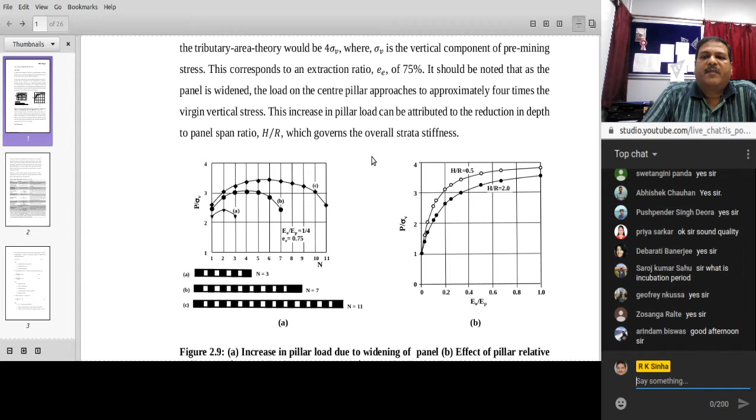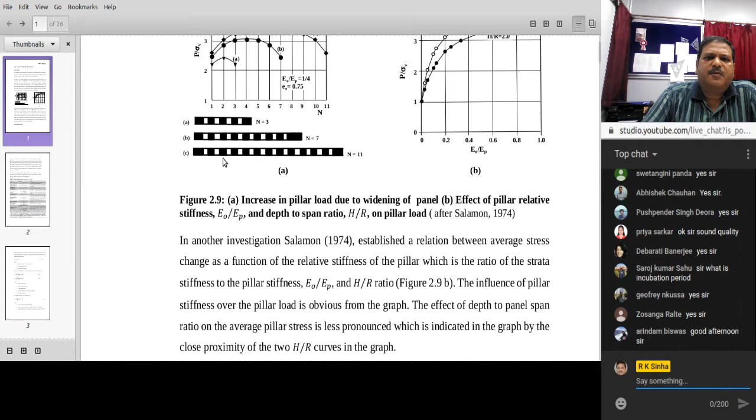So the integrity of the pillar is dependent upon how much load is coming on the pillar and also how much strength the pillar has. That we will discuss in just a few minutes. So these are the write-ups of those two graphs which I have already explained.

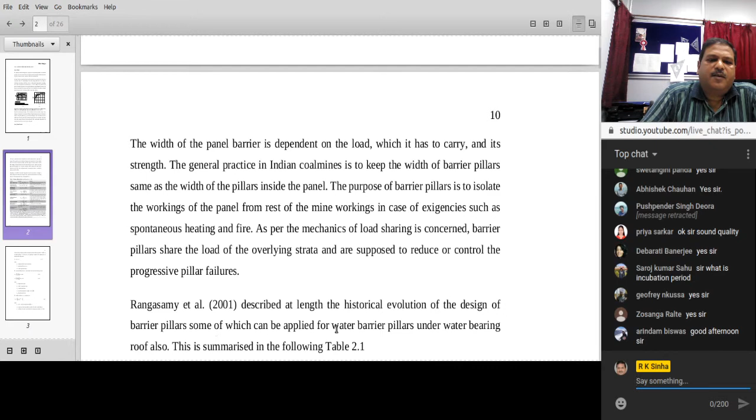Then one very good research was done in South Africa regarding the size of the barrier pillar, by Rangasamy and others in 2001, where they described the historical evolution of the design of barrier pillars, which can even be applied for barrier pillars under a water bearing roof. A summary of that is given here. You need not memorize this; these are empirical relations used long back in the mining industry, but they have slowly lost relevance. Rather, the formula given by Wilson is used frequently.

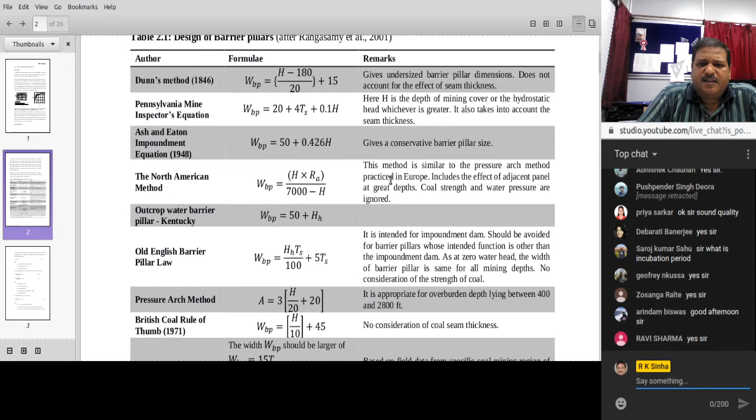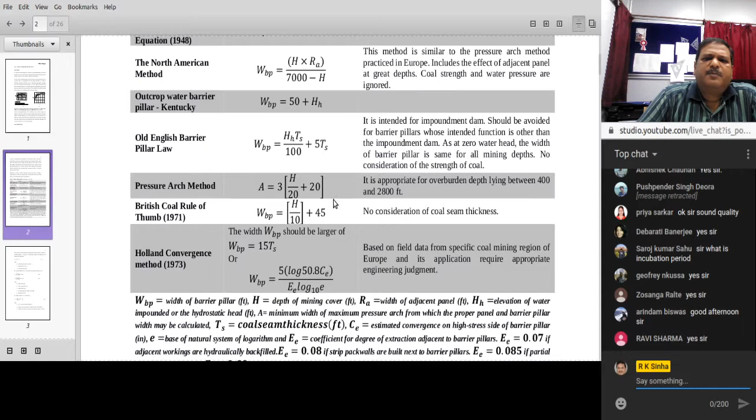So these are just for the historical or chronological development of barrier pillars. In the remarks column it is given which factor is considered and which is not, but while these were in use, accidents were still taking place in the mines. From 1846 to 1973, these formulae were quite popular. This is just for your knowledge and reference, not of much relevance as of date.

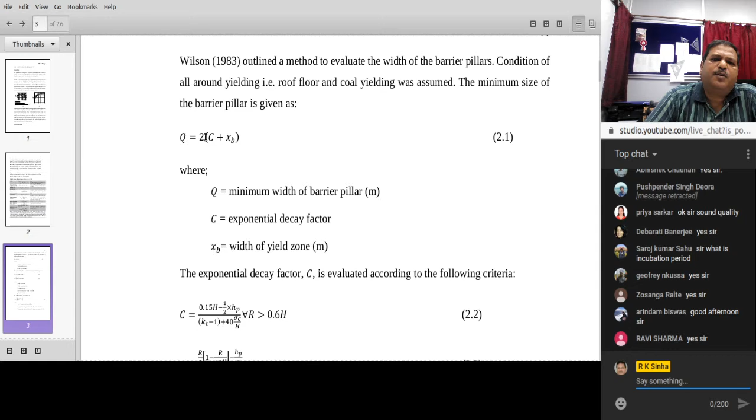Then in 1983, Wilson gave a formula to evaluate the width of barrier pillars. This is the formula used to estimate the width of the barrier pillar. It is given by the sum of two terms times 2, where q is the width of the barrier pillar, c is an exponential decay factor, which I will show you how to calculate, and xb is the width of the yield zone. When these two are added and multiplied by 2, you get the width of the barrier pillar.

Okay, the exponential decay factor c is calculated using this formula when R is more than 0.6 times H. R is the span or the width of the panel. If the width of the panel is more than 0.6 times the depth of the working, then you have to use this formula to calculate the value of c. And in case the span of the panel is less than 0.6 times the depth of the working, then you have to use this formula.

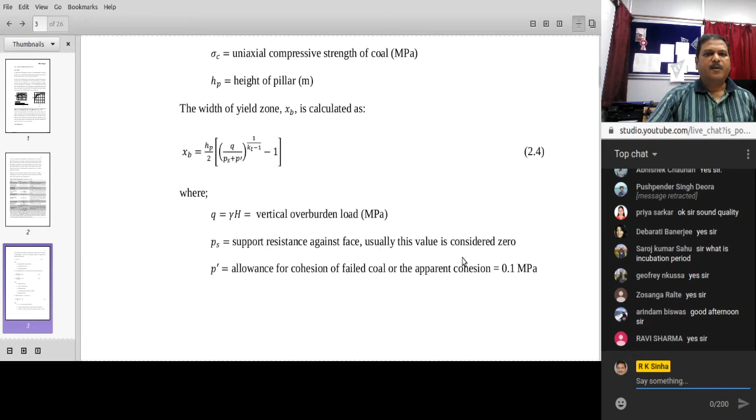And P' is the allowance of cohesion of the failed coal. So what is the C value of the failed coal? That is given as an input, and this is normally taken as 0.1 MPa. Okay, and KT has already been discussed here, triaxial stress factor. Okay, so you can substitute this value XB into formula 2.1, and with this the width of the barrier pillar can be calculated.

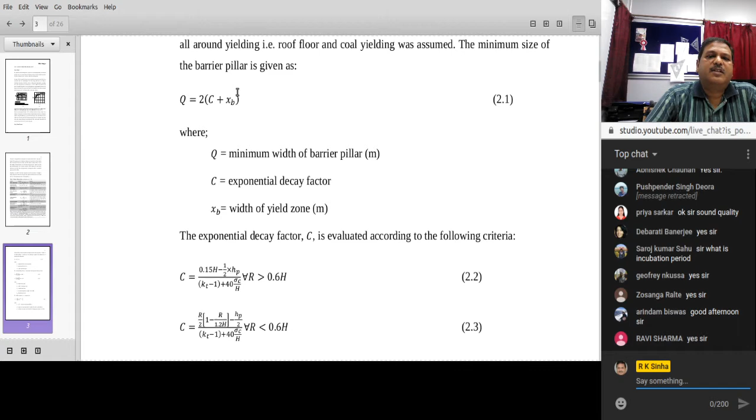So far as this calculation of the width of the barrier pillar is concerned, people have not talked about the factor of safety of these barrier pillars. Rather, they have just tried to estimate the width of the barrier pillar. Okay, now coming to the design of pillars. Like design of any structure, the design of coal pillars in bord and pillar working mines essentially consists in knowing precisely two things: the strength of the coal pillar and the load on the pillar. And when you link these two things, you get a factor of safety.

Now how do we calculate the factor of safety? Say for example, one minute, I will take the pen.

Okay, before we write something, let us consider that this is one sample. Now I am trying to compress it. The load at which it breaks is the strength of the material, and if you give more load it will crush faster, so the factor of safety will be less than 1. Now if I give less load, the sample is taking load but not breaking, so the factor of safety will be higher than 1.

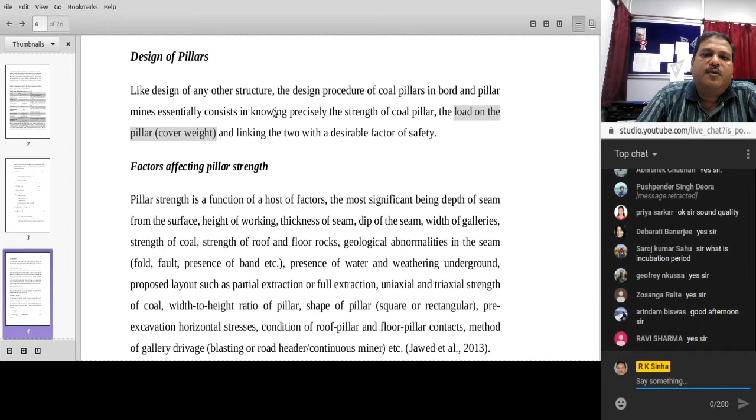So factor of safety will be calculated as FOS is equal to strength by stress. Okay, so this way the factor of safety is calculated. So when you link the strength of the coal pillar with the load that is coming, the load being the stress over the pillar, you get the factor of safety. Now it is not only the material strength.

Okay, are you seeing the PDF?

It is not only the strength of the material; other factors also play a vital role in affecting the strength of a pillar. The most significant one is the depth of the working from the surface, height of the working, thickness of the seam, the dip of the seam, the width of the galleries, strength of the coal, of course, and strength of roof and floor rocks.

Say for example, if the roof rock is very weak and the pillar is strong, the pillar will go on punching into the roof, or if the floor is very weak, the pillar will punch into the floor. So these factors also affect the pillar strength. Presence of water, weathering, partial extraction methods, or the full extraction method of the panel. Okay, all these factors play a role.

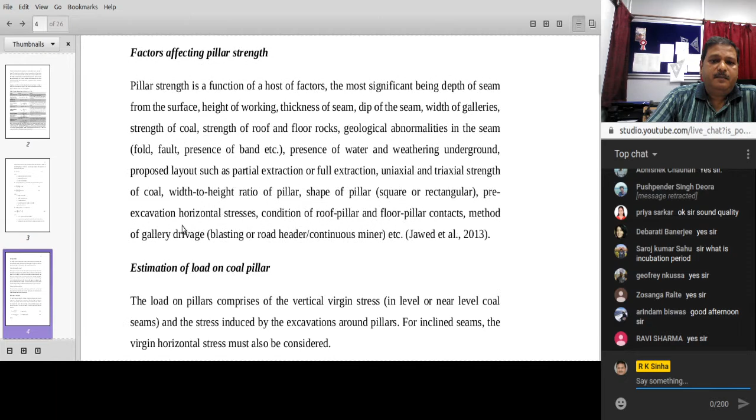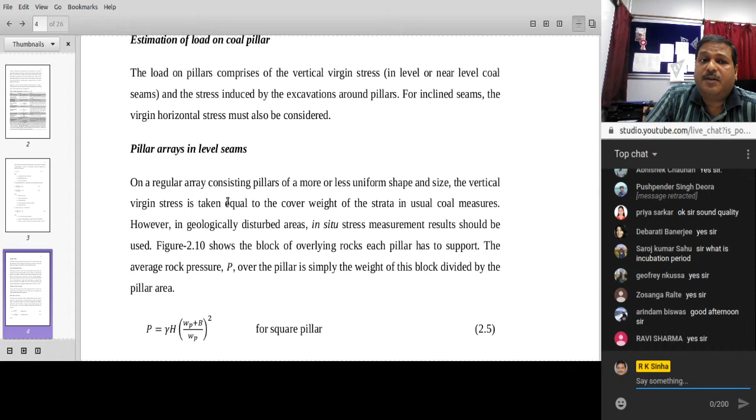So when we talk about the factor of safety of the pillars, the first thing that comes into our mind is how do we estimate how much load is coming onto a pillar. Okay, so this is the formula for calculating the load that is coming on a pillar. It is gamma h or rho gh multiplied by (WP plus B) divided by WP, whole square, where WP is the width of the solid pillar and B is the width of the gallery. This is calculated using the tributary area method.

Okay, I'll just give you a brief of that. Suppose this is my pillar and its width is W, and all around this I have galleries. And the width of the gallery is, say for example, B.

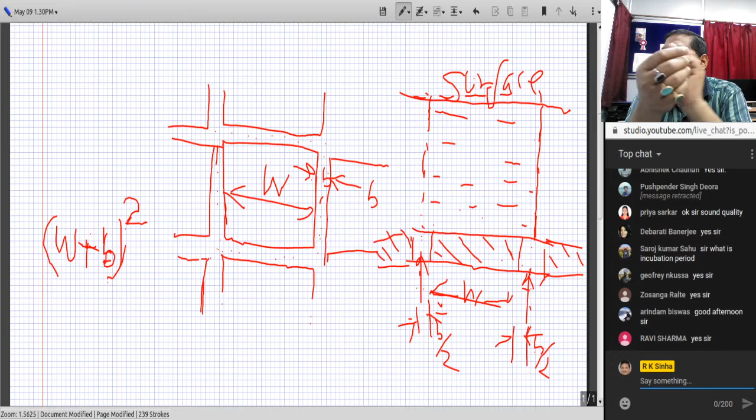And what is the width of this pillar? The width of the pillar is W, and the gallery width here is B by 2, and on this side also it is B by 2. That means the width of the column is W plus B. Since we are considering a square pillar, the total area will be (W plus B) whole square. And gamma into H will be the load acting upon the pillar. So this is stress times area, so it becomes the load acting on the pillar.

Now this total load is shared only by the pillar, and the area of the pillar here will be W square. So this gives me sigma V, or we can say the load acting on the pillar will be this value. So this is how you calculate the load acting on a regular array of pillars.

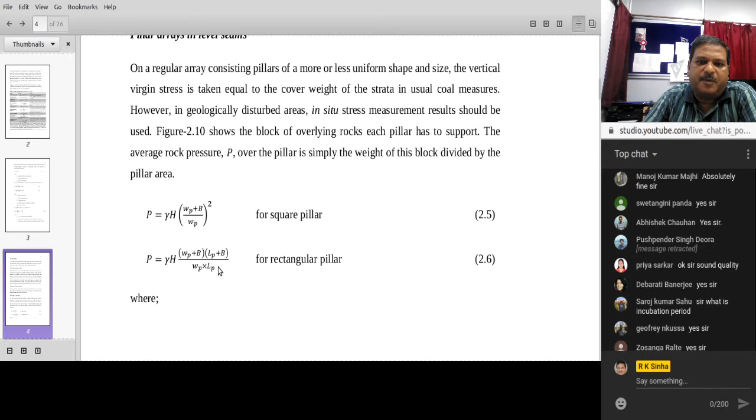Okay, good. So this is how the load acting on a pillar is considered. For rectangular pillars, you can derive it in a similar way. In that case you will have WP and LP. So this is nothing but the area of the complete column that is going to act over the pillar, and WP into LP will be the solid area of the pillar. This is how the load coming on the pillars is calculated.

Now this theory is known as the tributary area theory, TAT in short. And this theory is applicable only for pillars which are in a regular array. That means for development workings, you can very well estimate the load on the pillars using the tributary area method. But the moment...

Okay, Sampada has asked whether the depth of working is measured from the surface to the top of the pillar or to the bottom of the pillar. Good question. In the figure, I will show you.

Here rho GH, this rho GH. Are you able to see the pictures? Okay, let me switch to the scribble.

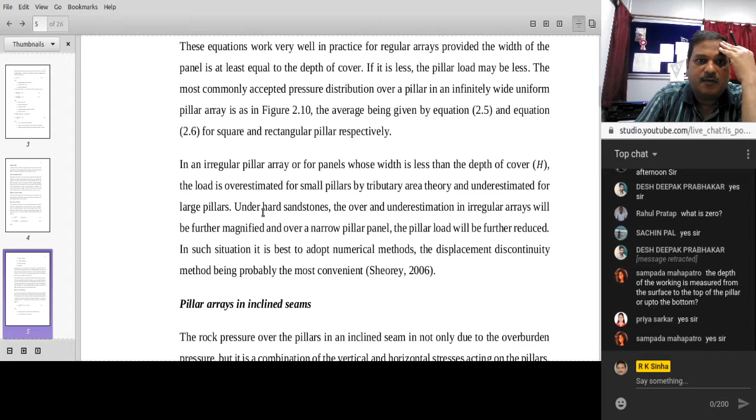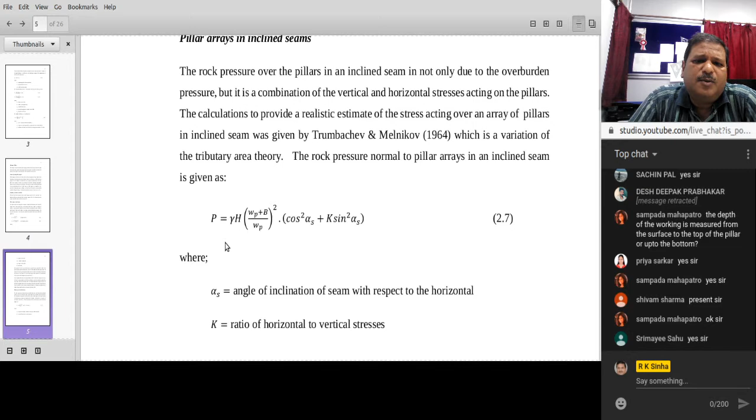Now another problem with this tributary area theory is that here also we are making some sort of approximation, whereas if the rock is elastic, the load on the pillar will not be uniform. It will be higher at the corners and then it goes down, and then again when it reaches towards the other corner it slowly increases and becomes highest. So in fact it will make a shape of an inverted umbrella.

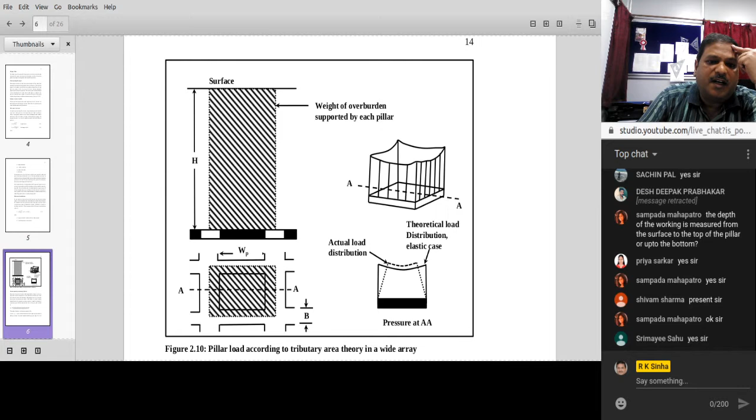Now in case the pillar starts behaving like a non-elastic material, or if there is a consideration of plasticity, then this reduces further as shown in the dotted line. Now some people have tried to use alternate methods different from the tributary area method, and they use numerical modeling.

Roberts in 2002 conducted a numerical analysis by varying the Young's modulus of elasticity, and he said let RL be the ratio of the modeled stress over the pillar and the load calculated over the pillar by the tributary area. He considered the elastic modulus of coal as 4 GPa. So if the value of RL is less than 1, this indicates that the modeled load is always less than the load calculated by the tributary area.

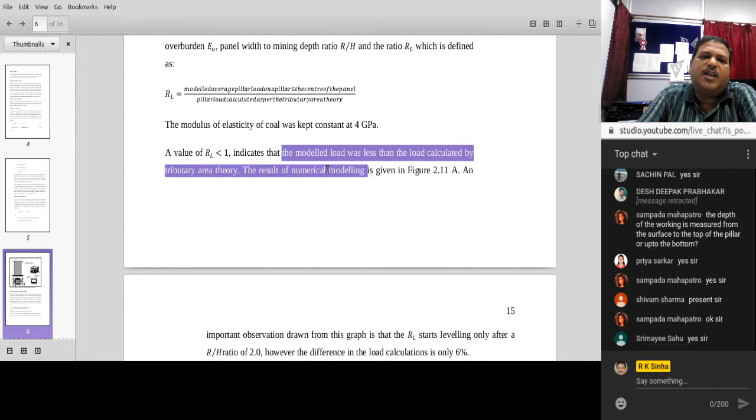RL can also be taken as a percentage deviation from the tributary area load. He plotted RL versus panel width to depth ratio, and he found that this value is less than 1, that is less than 100%. This indicates that the modeled load is always less than the tributary area theory. That means the load coming on the pillar is less than what we calculate using the tributary area theory.

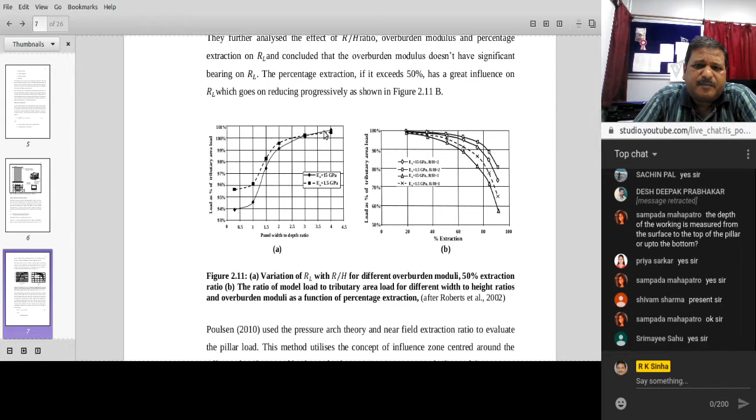But if the width to depth ratio is very less, it goes up to 94%. That means you have an error of only 6%. So the tributary area method of calculating the load on a pillar varies by only 6%. So it can be said that you can safely use this tributary area method for calculation of the pillar load on a conservative side.

Okay, that means the tributary area is giving more load. So at a higher load, the factor of safety reduces. That means you model the pillar as having lesser safety, showing lesser safety, but in actual it will have a higher factor of safety. So this way you are on a conservative side.

Then he carried out some parametric analysis on how the loads, this is again RL value, that is the load of tributary area versus the percentage of extraction. So if the percentage of extraction increases, the modeled load goes down very fast. So here, this left graph is for the regular pillars, but when you start extracting, the tributary area will give you almost up to 40% of error if you have an extraction ratio of 85%.

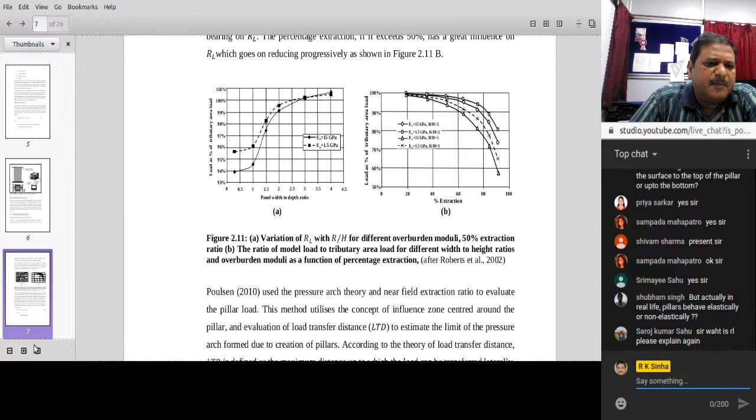Okay, so in the Kirsch solution, what we had studied is that on the sides of the tunnel, the rock element is loaded uniaxially, isn't it? And as you go deeper into the rock, the element in the deeper zone will be loaded triaxially. So obviously when the rock is loaded uniaxially, its strength is less.

So if these are two tunnels driven here, the material in between them is acting as a pillar. So whatever material is near the skin of the pillar, that will act plastically.

Okay, another question: Sir, what is RL? Please explain again. Okay. See, this RL concept is to find alternate methods for estimating the pillar load. One method is the tributary area method. Another method could be numerical modeling to find the load acting on the pillar.

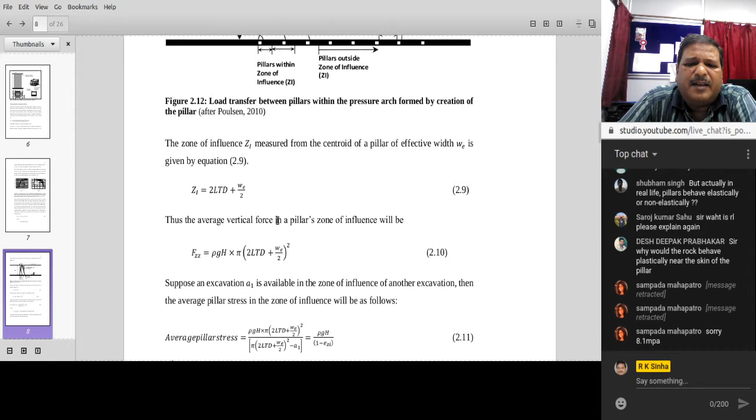Okay, then Poulsen tried to give the load transfer distance formula. That is not much used. In fact, you can just read it for your academic interest. But later at the end he also said that this method must be applied for estimating the overall panel stability rather than designing the pillars. So this LTD method is not used, but mostly people use only two things. One is the tributary area method, and another is the numerical modeling method.

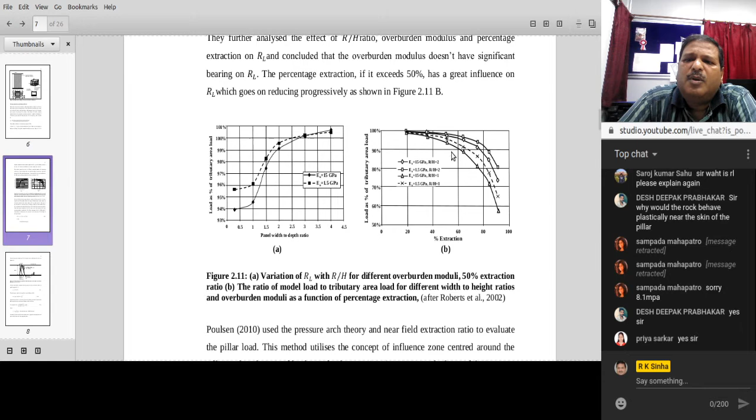And in numerical modeling, these two graphs show that for regular pillars it is only 6% of difference, but in board and pillar workings, when you start extracting the pillars, the array of the pillars is not regular, and once the array is different, the tributary area method can give you error up to 60%. So there you really need to know the load on the pillar using numerical modeling. Okay, so this Poulsen is just for your academic interest.

Now another interesting thing of again academic interest, that is the history of the development of the coal pillars. And in that, 4 or 5 pillar formulae are important, which I will tell you subsequently in this lecture itself, which are the important ones for calculating the strength of pillars. So

now again coming back, I would like to correlate the things with you again. So we are concerned with the factor of safety. The factor of safety is linked with the load coming on the pillar and what is the strength, and the factor of safety is correlated here with the strength versus stress. So up till now we have discussed how to estimate the stress of the pillar. Now we will be discussing how to estimate the strength of the pillar. Once you know the strength of the pillar and the load acting on the pillar, you can very well calculate the factor of safety of the pillar.

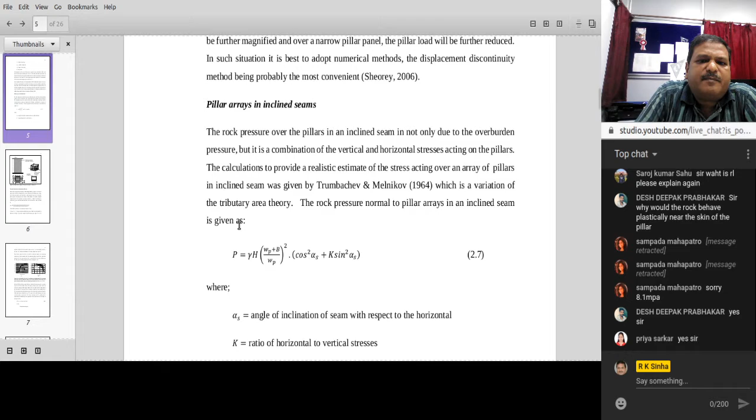Okay, so we switch now to finding the strength of the pillar. See, this science of pillar design, according to Coulomb, is traced back to 1773, in which Christopher Mark is another known name in the area of rock mechanics from NIOSH, USA. He is a rock mechanics scientist in the National Institute of Occupational Safety and Health, which comes under CDC, that is the Center for Disease Control in USA.

So he traced back the history and he said that in 1773 itself, people were thinking about the scientific design of pillars. But the first documented thing came in 1911 by Bunting.

Bunting tried to test the strength of the different sizes of cubes and prisms, and he tabulated them in a table in increasing order of size, and he found that there is some correlation between this. So this is what prompted him that if we increase the size of the sample, the strength decreases.

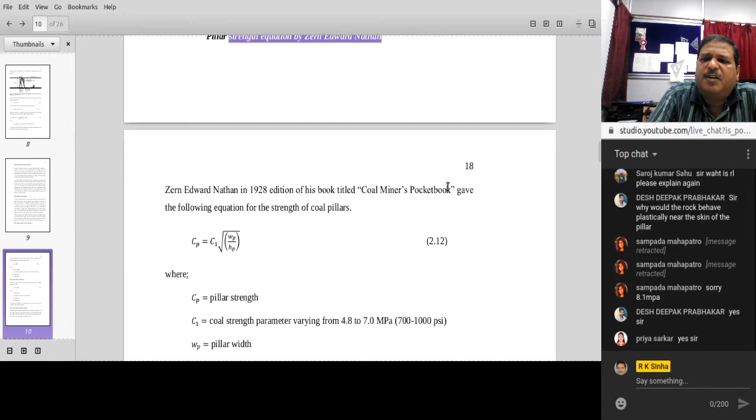Then one important formula was by Zern Edward Nathan. He wrote a book in 1928, the Coal Miner's Pocket Book, and he gave the formula for the strength of pillars, where Cp is the strength of pillar, C1 is the coal strength, which normally varies from 4.8 to 7 MPa, Wp is the width of the pillar and Hp is the height of the pillar.

From here onwards, note down that we will use the symbol Wp as the width of the pillar, Hp as the height of the pillar and Cp as the strength of the pillar. So this formula was given by him. Later on, Greenwald carried out tests on samples of 30 meter size. What you observe is that for width to height ratio, these are all power functions. And the general formula, whatever has been developed, you will find more or less in this form.

Where is the scribble? Okay.

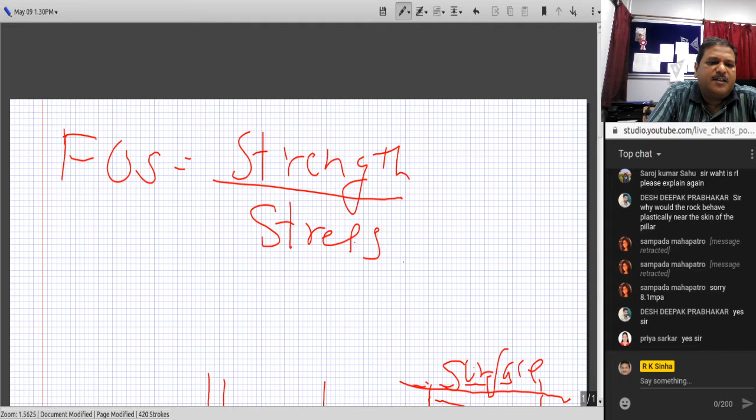Cp is equal to K times W power alpha, height power beta. This is known as the power formula, and for almost 100 years people have been doing research on finding different formulae for estimating the strength of the pillar. This research has been going on so long because in every region of the globe the coal pillar behaves differently, the geology behaves differently. So each country develops its own formulae.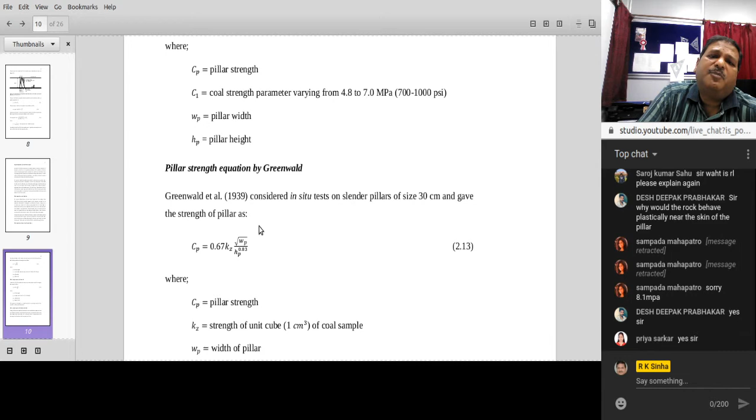So this was by Greenwald. Another was by Holland and Gaddy. He used the dimensions of the specimen and the strength of the coal specimen. He used a 1 inch cube of the sample in the laboratory, tested it, and called it sigma C25. SC is the coal specimen strength, using regular laboratory methods. So he found this strength for a 1 cubic inch size, and sigma C25 is used because 2.5 centimeters is 1 inch, so sigma C25 has been used here as a notation.

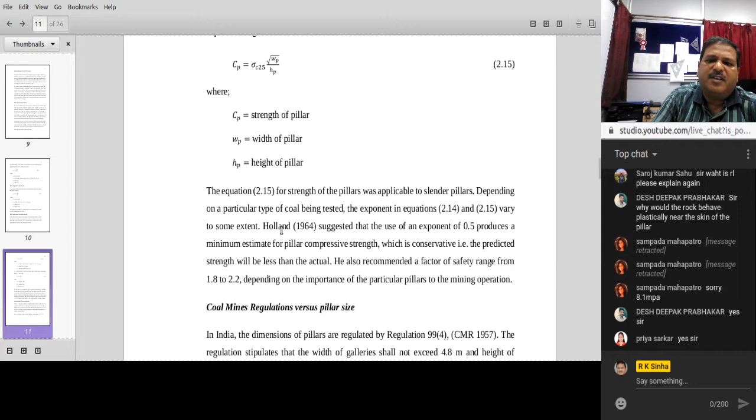Then he found the pillar formula with Wp by Hp and so on, given by Holland and Gaddy in 1957. In 1964 he modified the exponent to a different value. Now in the Coal Mines Regulation of 1957, the size of pillars was defined this way: if your depth of working is 60 meters and the gallery width is not more than 3 meters, then you have to maintain at least 12 meters of pillar.

In the Coal Mines Regulation, when they say pillar center to center, this means, suppose I have two pillars, from this center to this center is the width of the pillar. Or in another way, if this is the board width B, then W plus B will be the width of the pillar center to center, whereas W is the solid width of the pillar. This is just the geometry of the pillar.

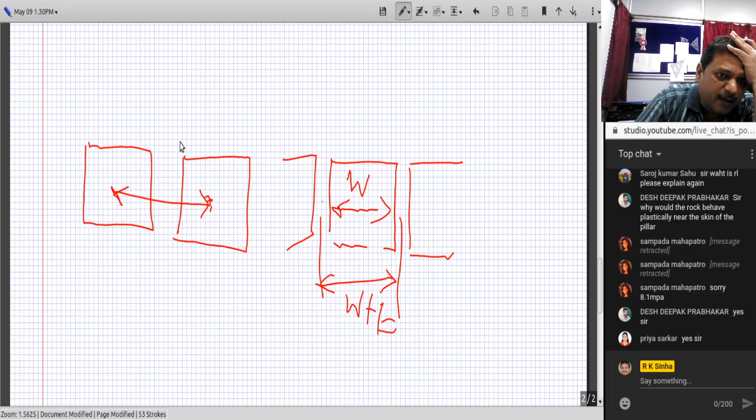If we have two pillars, the distance between the centers of the pillars is treated as center to center, or in another way you can calculate the center to center distance using the gallery width. If gallery width is B and solid width is W, then the center to center distance is W plus B. You can draw the geometry and verify it yourself. Not a big deal. So we come to the PDF again.

Depending upon the width of the gallery, 3 meters, 3.6 meters, 4.2 meters or 4.8 meters, and for various depths, the DGMS has specified the minimum size of the pillars, that is, the distance between the centers of adjacent pillars. You can go for a higher size of pillar, but you cannot go for a lower size of pillar.

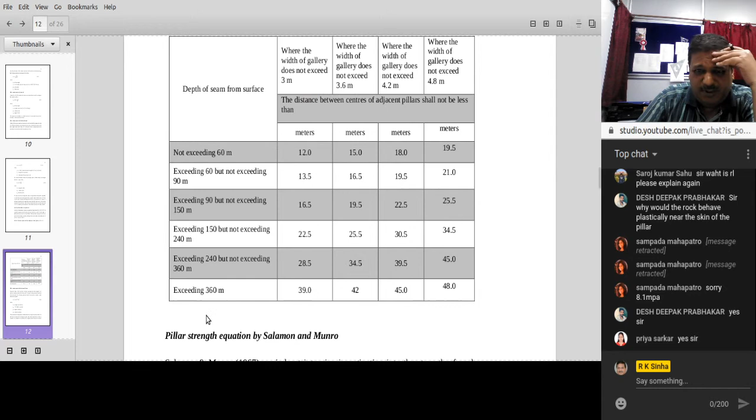So this was given in 1957 in CMR, and still it is being worked out, because this comes on the conservative side of the pillar design, and it's very safe, over safe, we can say that it is over safe. So that has been used.

Now one big thing came through Salamon and Munro in 1967. This is a very important formula as far as your academic things or the practical aspects are considered. Many people are using this formula throughout the world, because this was statistically developed through analysis of 98 intact and 27 collapsed pillar geometries of South African coal mines. Such a huge database of practical relevance has gone into the derivation of this formula.

And still, if you don't have any formula for the strength of the pillar or any other thing, you can use this formula safely. People use many formulas, but they also start comparing with the Salamon Munro formula, and verify whether their formula is somewhere near to the Salamon Munro formula. Okay, so this width to height thing was used. KSM is one constant. This constant is taken as 7176 kilopascal. So this is an important one.

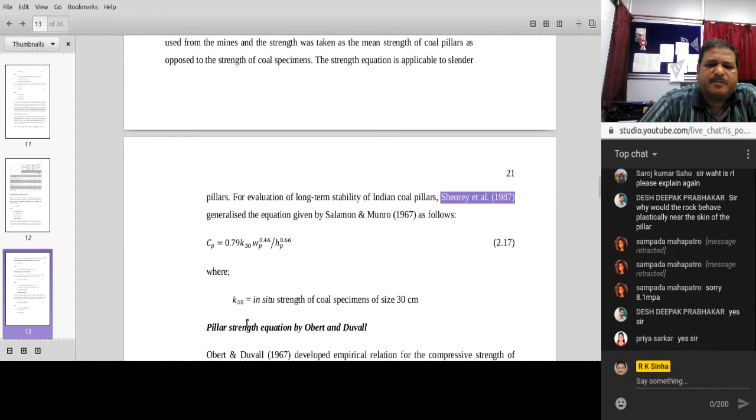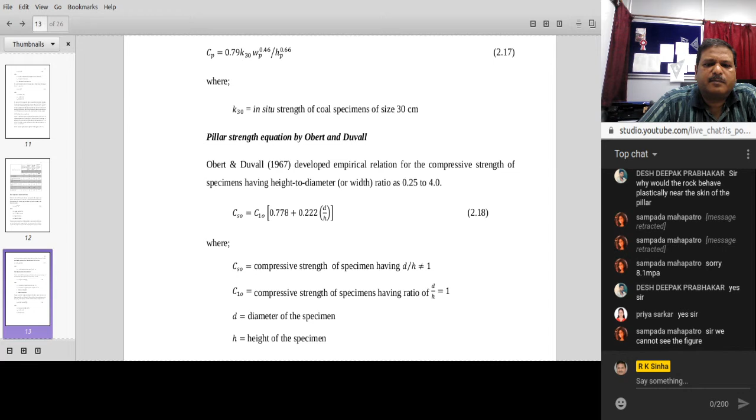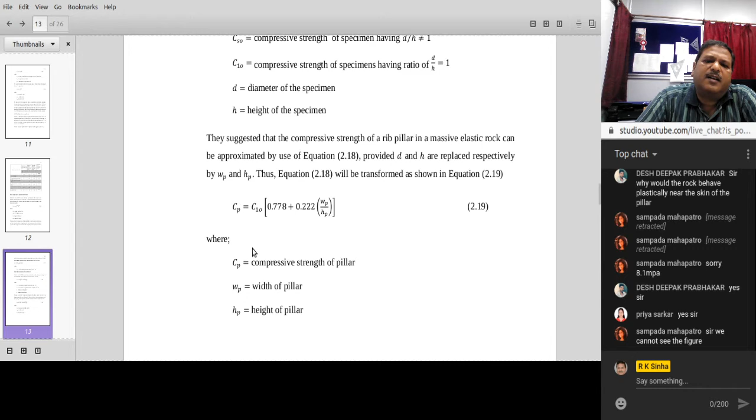Now in India, the same thing was modified by CMRI by Sheorey in 1987, and he gave the strength of the pillar as this. Okay, later on Obert and Duvall gave another formula considering the width to height ratio and another constant C1. Okay, Cook gave another formula.

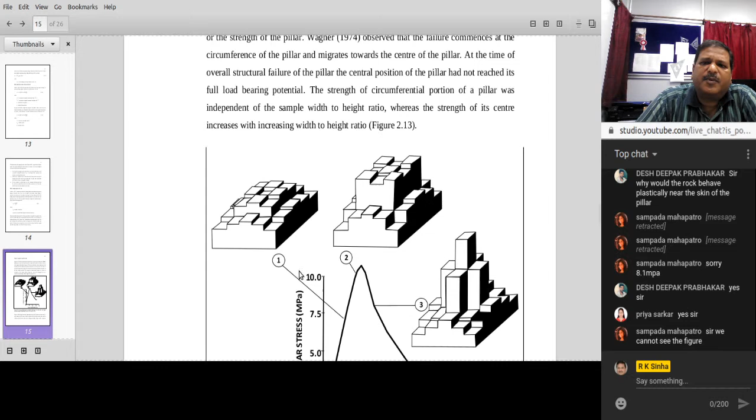Wagner gave a concept saying that the central portion of the pillar has higher strength and the outer pillar has lower strength. This is nothing but again the extension of the Kirsch's equation concept, which we discussed now, that the skin of the pillar will have lower strength, and as you go deeper into the pillar, its strength will be higher. So this concept was basically given by Wagner in 1974, not by correlating with the Kirsch's equation, but through his own methods of study. So this can be correlated with the Kirsch's equation also.

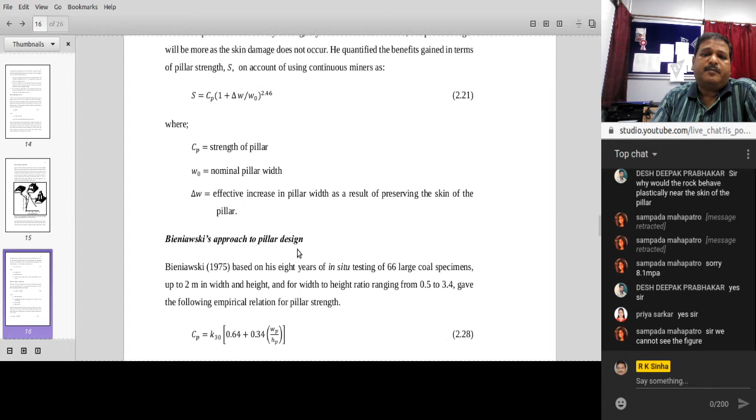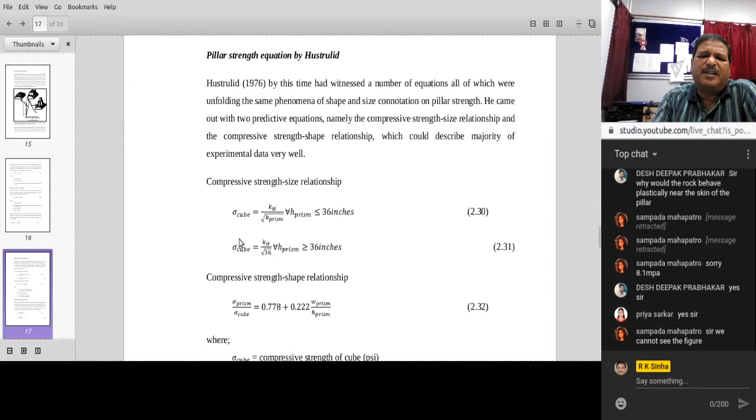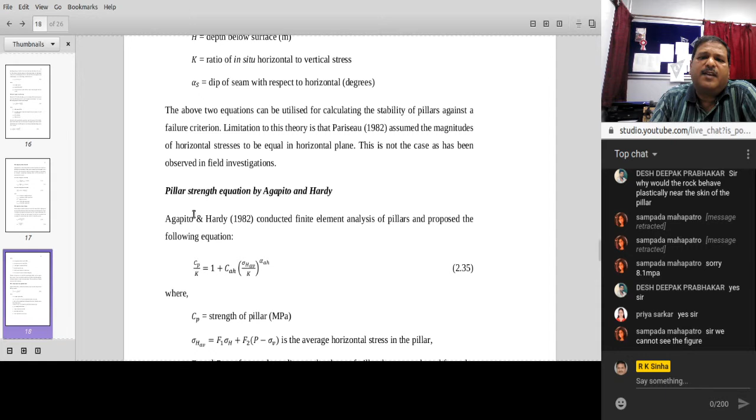Bieniawski in 1975 gave another formula, that's not so important. Hustrulid again tried to find the sizes and tried to give the formula, not so important. Pariseau tried to give the shear component and normal component over the pillar for inclined pillars considering the K value. This formula you can read through the books of William G. Pariseau, available on the net also. Now using numerical modeling, the strength was calculated by Agapito and Hardy. Again, not so important, but you must know it, you can read through it.

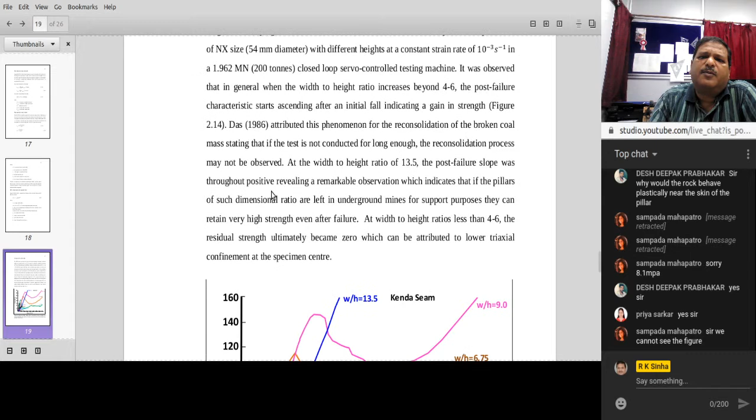Now in India, Das extended the concept of Wagner again. What he did, he used rock specimens of different length to height of 54 millimeter dia samples, and he loaded them onto a loading machine. So the dia was constant, only the length was varying. So width to height ratio will automatically vary. So this graph is the classic graph given by Das, which indicates that as the width to height ratio is less, it simply behaves like a sample in the laboratory. The pillar will behave like a laboratory material.

But as it increases, you see here it has shown a failure, and then it goes down, and if you go on loading it again and again, still it has a load bearing capacity, and then here it again starts picking up. The strength starts picking up because of the triaxial confinement. So this portion of the graph, which is increasing after the failure, is known as the strain hardening concept.

So he gave the concept of strain hardening. According to this, say for example, if the width to height ratio is 9.0, that means the pillar will take some load, it will fail, and still it will have a capacity to take the load even after failure. And if the width to height ratio is more than 13.5, then it goes on taking the load and it doesn't break.

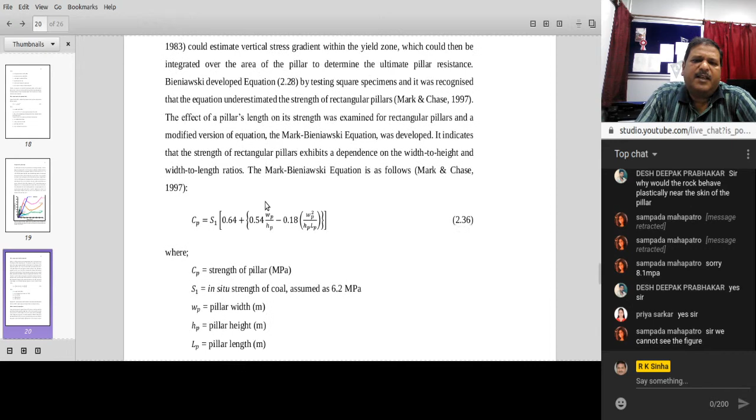Mark and Bieniawski gave this formula, and this formula is being used by one software from NIOSH, which is known as ARMPS software. ARMPS is Analysis of Retreat Mining Pillar Stability. So that software uses this formula for calculating the stability factor. It is not safety.

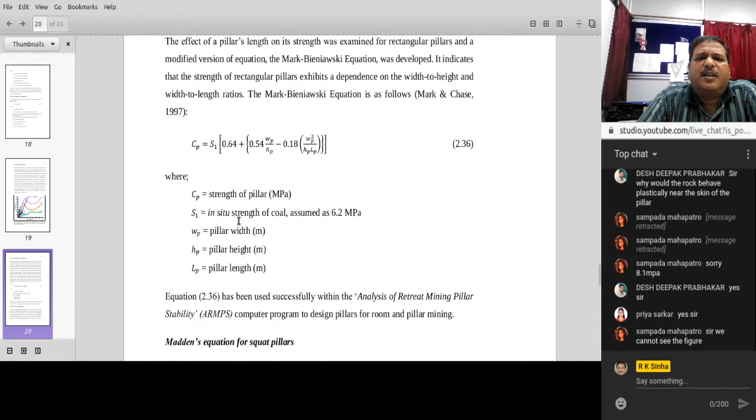ARMPS is analysis of retreat mining pillar stability. Here they use this formula to find out the stability factor. They are not calculating the FOS. They have come out with a method for calculating the stability factor, which is more or less synonymous to the factor of safety.

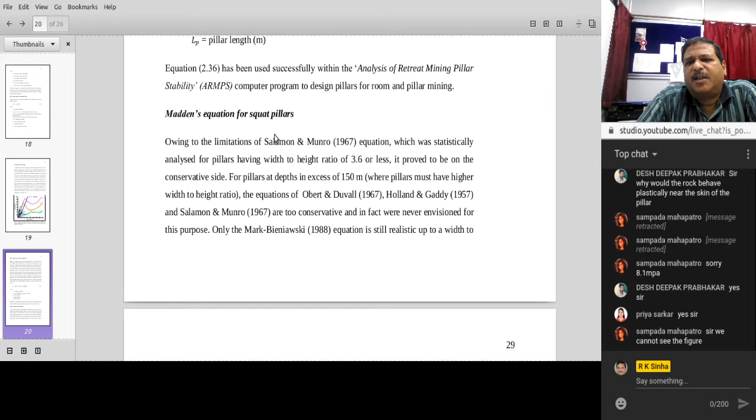Now, so far everyone has discussed the length, the size of the pillar, the width to height ratio, but nobody talked about what will happen to the squat pillars. When the width to height ratio is more than 5, that is taken as a squat pillar. So for squat pillars, Madden gave a formula in which we consider the R0 value, known as the critical width to height ratio, which is taken as 5.

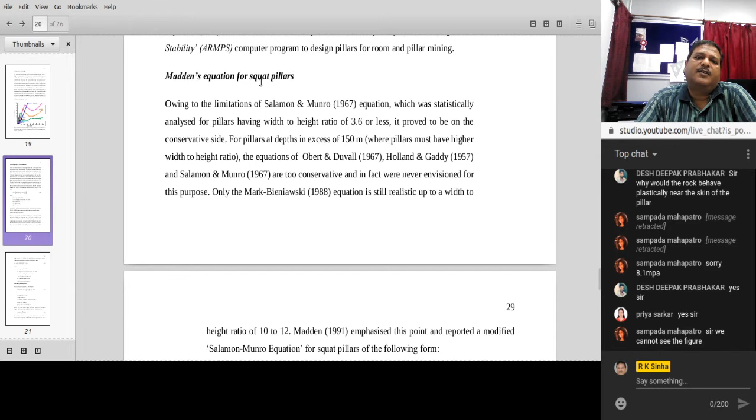So when you need to calculate the strength of squat pillars having width to height ratio more than this, this formula gives a better estimate of the strength. Now, this is another important thing. The first one is the Salamon-Munro formula, second one is the ARMPS formula, and third is this one by the South African, that is Madden's equations for squat pillars.

And in India this equation is of more relevance. All people discussed the width to height ratio, but nobody tried to consider the depth of the working or the in situ stress. So Sheorey in India developed an equation which takes into consideration the depth of the working also, including the width to height ratio, and sigma C25, the laboratory strength of a 1 cubic inch sample. This has been in use in the Indian context for design of pillars.

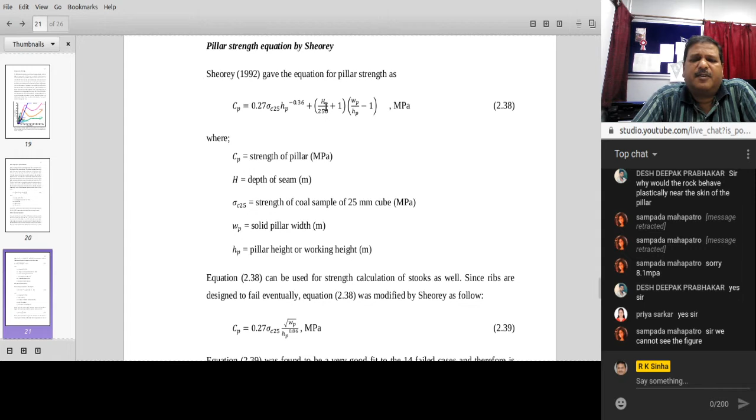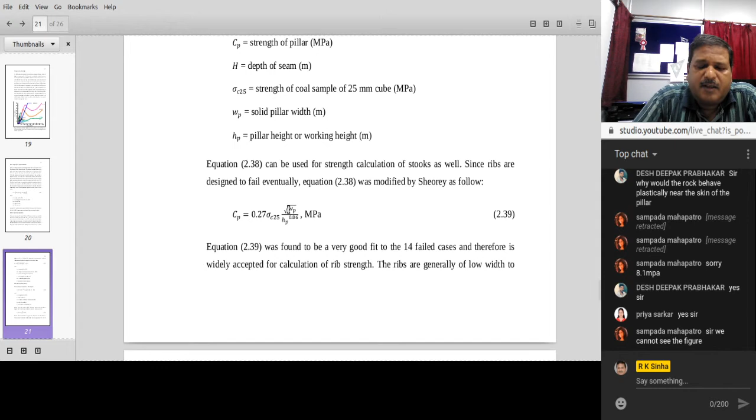And when you go for design of the stooks or ribs in bord and pillar working, then this formula is used for finding out the strength; the rib strength can be calculated using this equation.

As far as factor of safety is concerned, if anything has a factor of safety less than 0.6, it is going to fail immediately. If the factor of safety lies between 0.6 and 1, it is stable for a few days. If it is between 1 and 2, it is short-term stability; it will fail progressively, in a few years. And if you want to design any structure with long-term stability, you need a factor of safety of 2.0.

So inside a panel, a rib, if you have to extract remotely using machines, it is dangerous, but if your machine is able to extract faster, you can go for rib stability between 1.0 and 0.6. And for panels or stooks, if you want to keep them stable for a few years, you can use a factor of safety of 1 to 2. These are some of the values of the in situ strength of coal, which can be of academic interest.

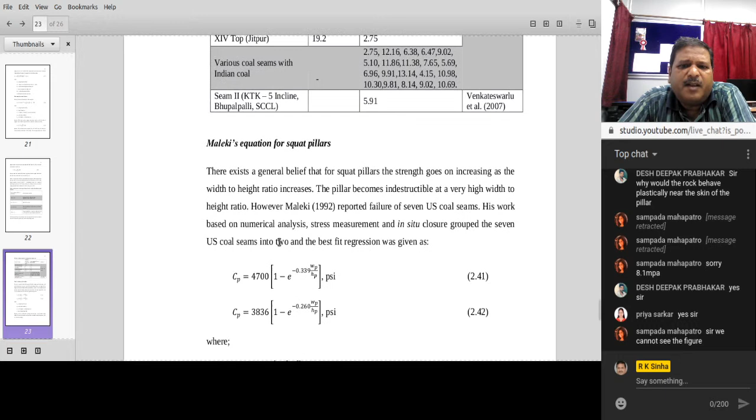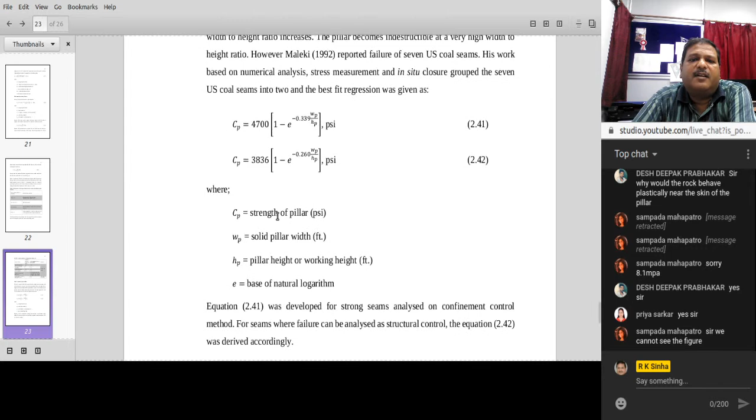Now, when Das gave the concept of squat pillars, that they are indestructible, in the US, Maleki in 1992 reported failures in 7 US coal seams. Till then, people believed squat pillars are indestructible. That concept was refuted, and he gave the formula for squat pillar strength.

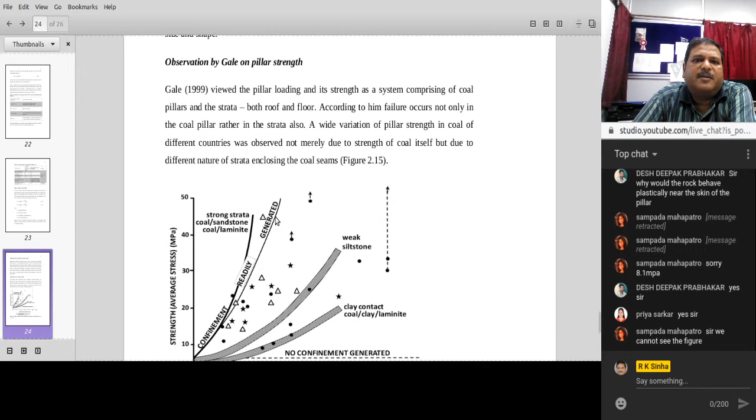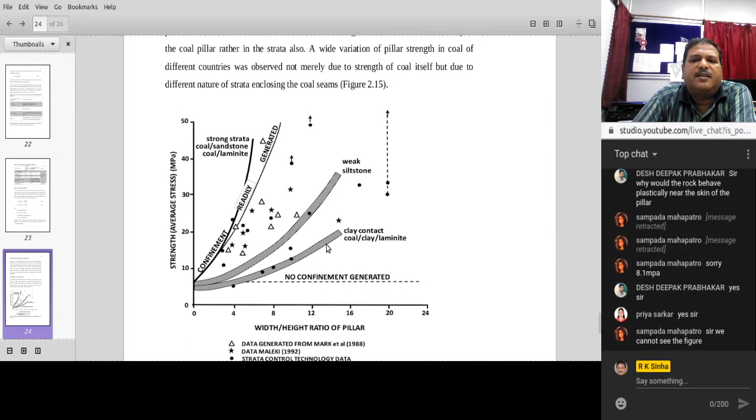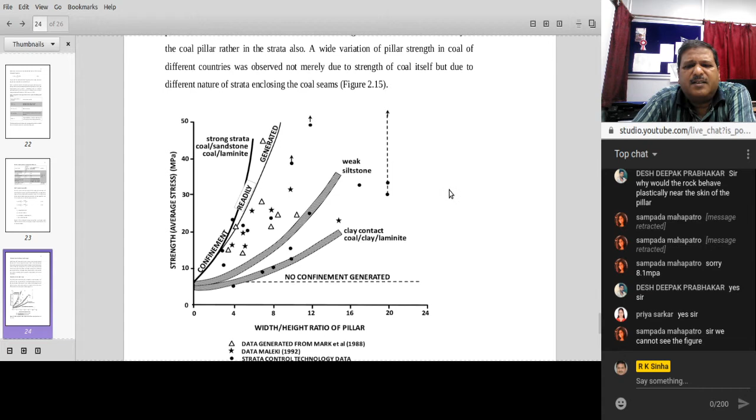Now, a geologist, Gale, in 1999, tried to correlate the geological contents and strength versus width to height ratio, carried out a lot of statistical analysis from the given data, and came out with a confinement concept. He said that if you have weak siltstones, the operating range of factor of safety should be in this area, and so on. So for different geological conditions, he gave this classical graph.

Now people have used numerical methods using FLAC 3D to find out the strength of pillars. This was done by Sheorey in 2006. So research is still going on on the strength of pillars, but although textbooks have considered laboratory testing an integral part of pillar design for nearly 30 years, it has remained controversial.

One reason is that coal is notoriously difficult to test in the laboratory. Even 6 to 7 tests are required and you don't get a real estimate of the strength of the coal. So a lot of research has to be done in this area. So this is about the pillar design approach.

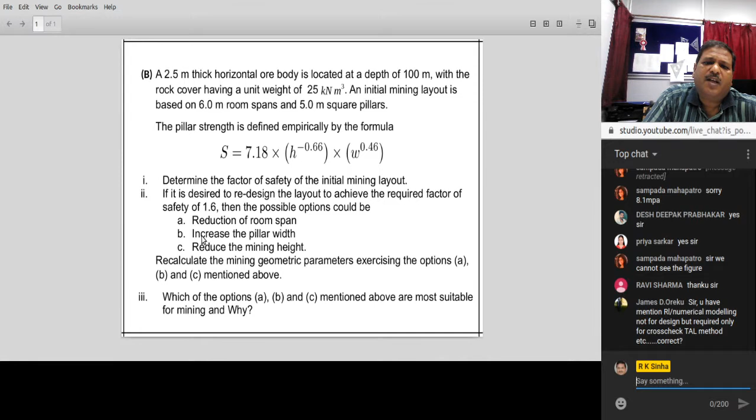The next strategy is, let us go and increase the width of the pillar, because as you go on increasing the width of the pillar, keeping the height constant, the factor of safety increases. So for maintaining a 1.6 factor of safety, you need to increase the pillar width. I just give you the answer for 2 part A: the room width, or the bord width or gallery width, will be 2.16 meters.

And for strategy 2, here is a catch. See, width you are varying. So the strength formula will contain W, but height is taken as 2.5, and then you calculate the tributary area load keeping W as a variable.

Okay, so when you use the formula FOS is equal to strength by stress, then 1.6 is equal to factor of safety. Strength will consider a variable W, and the load will also consider a value W, and then you have to solve this equation as a function of W, and that can be solved using the Newton-Raphson method. And then for B, you will get 3 iterations, and you will find that the pillar width turns out to be 9.2 meters.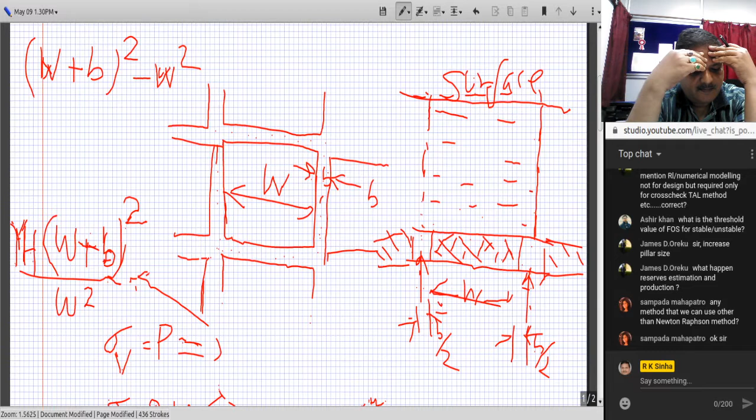W plus B whole square, if we consider another dimension. Now in this, if I extract completely, W square has been taken. And this is what percent of the total available area? W square by W plus B whole square. So this value is equal to 1 minus W by W plus B whole square, and this is termed as the percentage recovery.

So in each case you have to calculate the recovery, and when you are calculating all these values, simultaneously you calculate the recovery for each case, and finally you will be commenting that whichever is having the maximum recovery, that is the best solution.

So this is just the solution strategy I have given you. Still, I think most of you will be finding it difficult because in the online method I am not able to see your faces, and I am unable to get any feedback on how the students are understanding or not. Probably this might have gone one way, but still I give you a hint. This problem has been defined from a concept

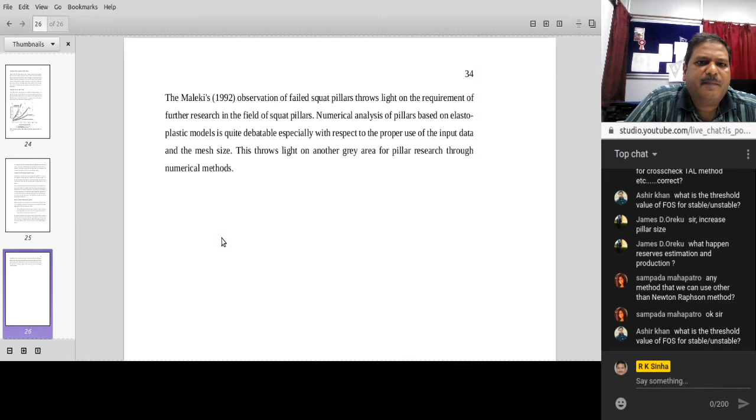And Ashir Khan's query is, what is the threshold value of FOS for stable or unstable? Ashir, I had discussed this FOS for stable or unstable. You have not asked whether it is a pillar or any other structure, but still I will show you that PDF. See, this is the table that can be used for your design of structures.

Suppose in a rib, if your factor of safety has gone less than 0.6, within hours it is expected to have a failure. You have asked it for pillar; now let me generalize it for everybody. Any structure you are going to design underground, any civil structure, you need a factor of safety more than 2.0. Some people use 1.25, 1.5 also. This is debatable, but in general this table is based on the failure criteria, and designers design with a factor of safety more than 2.0 for long-term stability.

Suppose in a mine roadway, the haulage roadway, that has to serve throughout the life of the mine, there you cannot play with the factor of safety. You have to be on the conservative side. So in that case, you always go for a higher factor of safety of 2.0. That is more than enough.

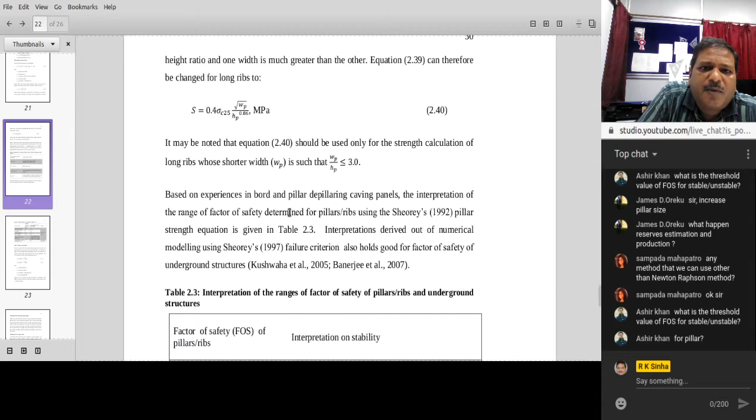And this 0.6 to 1 is normally used when you are extracting the ribs in bord and pillar workings. Okay, so when you are taking out a slice in the depillaring and you are leaving a rib, the width of the rib is an important thing. How much width can you take? Normally it is mandated that you have to leave a 3 meter width of rib. So when you are leaving a 3 meter rib, use the Sheorey formula, this equation 2.40, to estimate the strength of the rib.

And the load, in this case, you have to estimate through numerical modeling, because when you are doing depillaring you cannot use tributary area theory. So with that you find out the factor of safety, and if it is lying between 0.6 and 1, you can very well extract it. Then once you go to the end of the slice and start retreating, you start taking away the mineral from that rib also. That is known as robbing in the coal stook, robbing of the ribs.

So when you have to go for robbing of the ribs, again you need to calculate up to how much thickness I can rob this rib. Any thickness which is giving you a factor of safety less than 0.6, you need to be very careful. It can fail immediately or within a few hours, and all your machines and men will be entrapped. So that care has to be taken.

But in practical situations, the guidelines which have been given by DGMS are very conservative and they work very well. You need to calculate all these things when you are really thinking of improving the recovery or the efficiency. Then you really need to go for these calculations. I hope this has cleared your doubt.